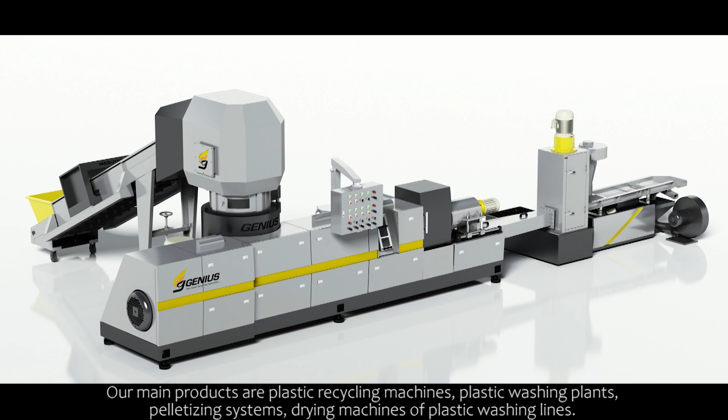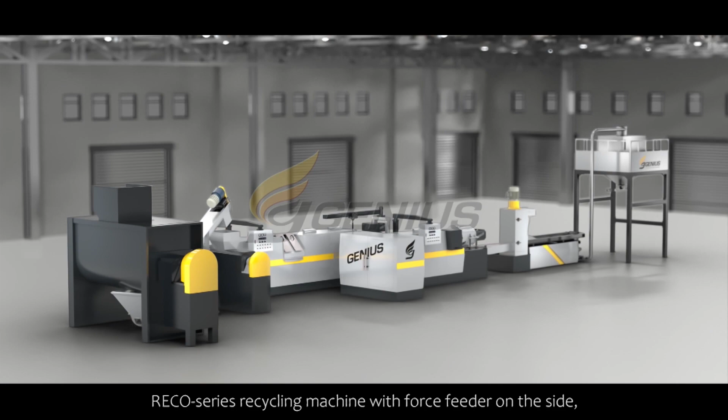Mr. Peter, what are the main products that Genius Machinery manufactures? Our main products are plastic recycling machines, plastic washing plant, pelletizing system, drying machine of plastic washing line. Additionally, we also produce shredders and crushers. Oh, very interesting, Mr. Peter. Talking about that, what are your most popular machines? Our popular machines are KRIEGER Series cutter compactor recycling machine, RECO Series recycling machine with force feeder on the side, and DW Series squeeze dryer.

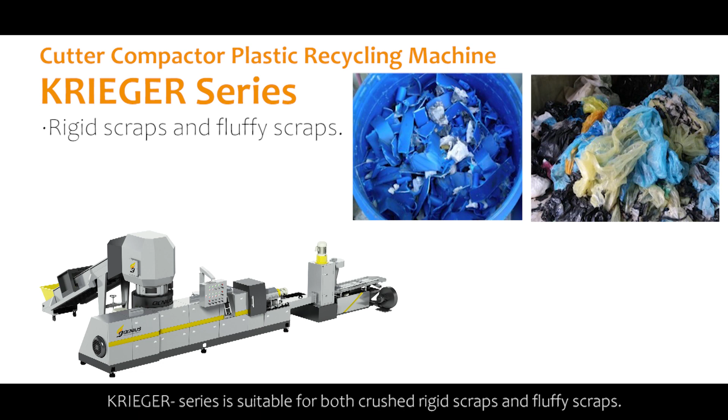Mr. Peter, you mentioned your KRIEGER series. Can you explain more about those machines? KRIEGER series is suitable for both crushed rigid scraps and fluffy scraps. The capacity of this series is from 80 to 1,500 kg per hour, depending on the model. The feeding device sends the material to the cutter compactor, which has different functions such as crushing, drying, and compacting the materials. It steadily sends material into the extruder.

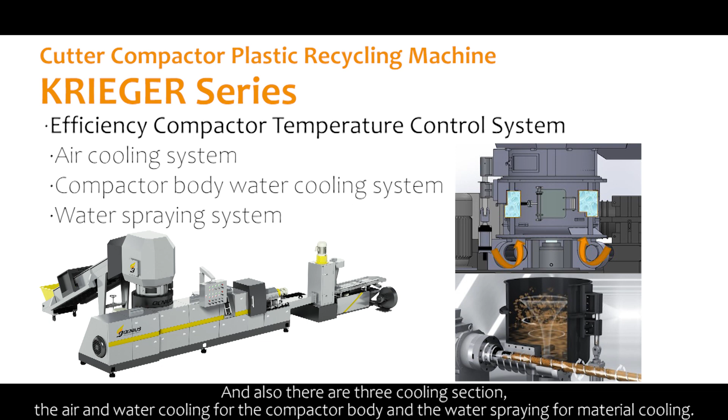And also there are 3 cooling sections, the air and water cooling for the compactor body, and the water spraying for material cooling. The operator can set the temperature of each to stably control the compactor's temperature.

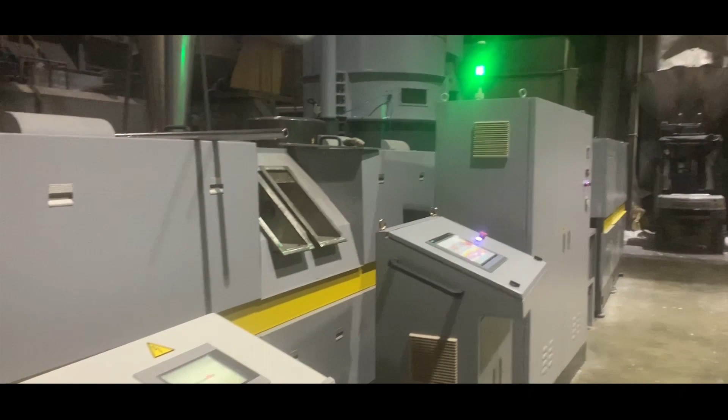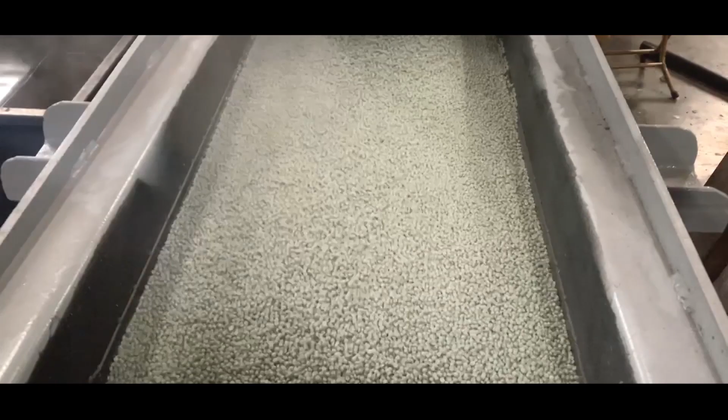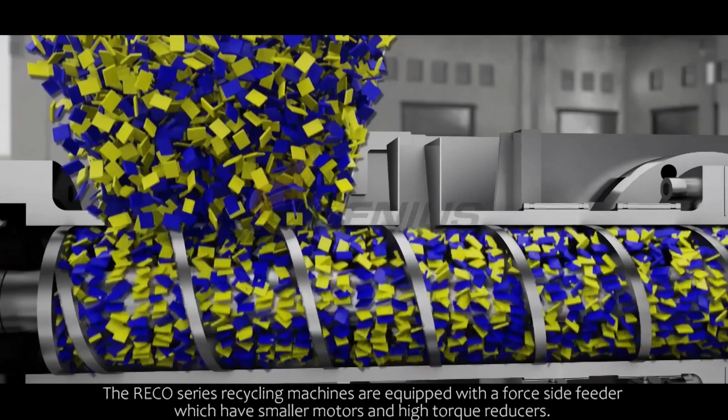Mr. Peter, your RECO Series are recycling machines with force feeder. Can you explain the features of these machines? RECO Series recycling machines are equipped with the force side feeder, which have smaller motors and high torque reducer. The crushed rigid scraps are sent into the extruder steadily. If you recycle the rigid and the crushed scraps only, this model will be the best. It can save much energy in processing.

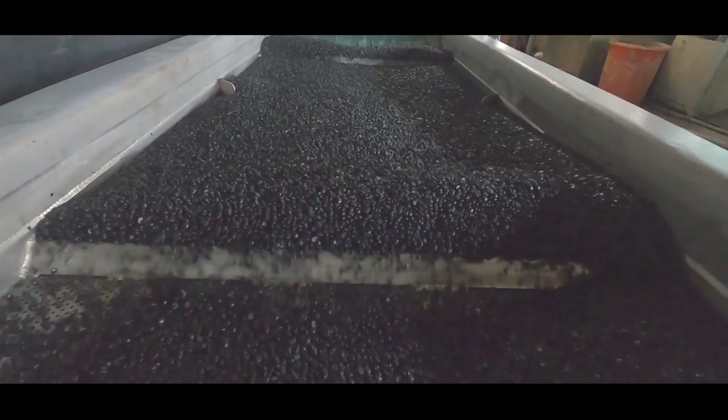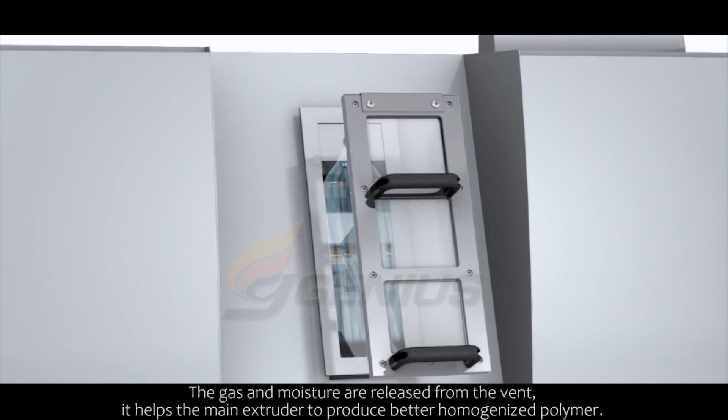Mr. Peter, your KRIEGER and RECO Series are well recognized in the industry. Is there any specialty on them? For both KRIEGER and RECO Series, we install a degassing system. The gas and moisture are released from the vents. It helps the main extruder to produce better homogenized polymer. An optional vacuum system is available to increase the degassing effect.

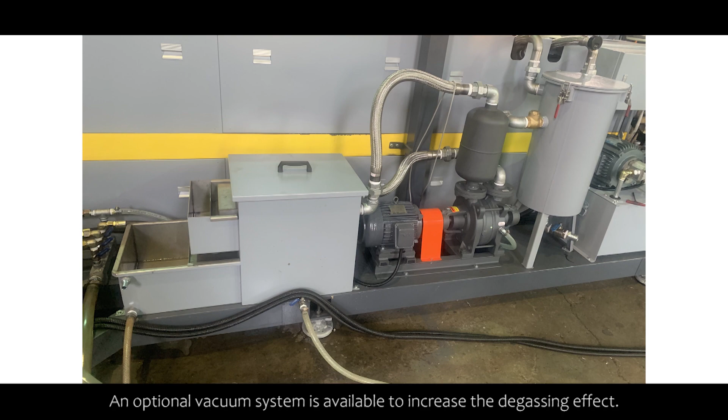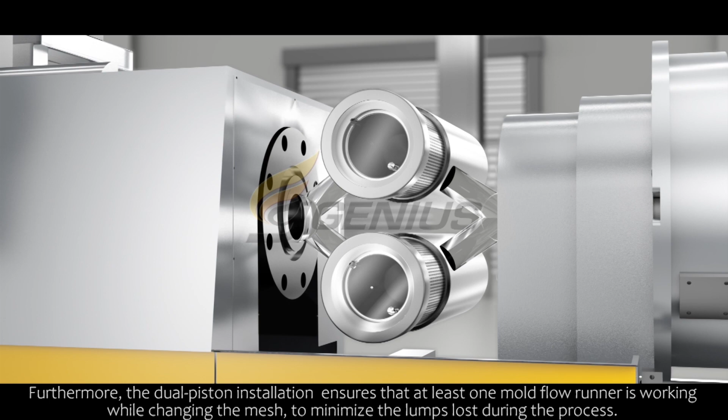And we have different kinds of filters. One is the dual piston filters, which have larger filtration areas. From our experience, it could provide up to 3 times the filtration capacity than the pure plate filter. Furthermore, the dual piston installation ensures that at least one mold flow runner is working while changing the mesh, to minimize the lumps lost during the process. We also cooperated with European companies who manufacture self-cleaning filtration systems like Fimic or Ettlinger.

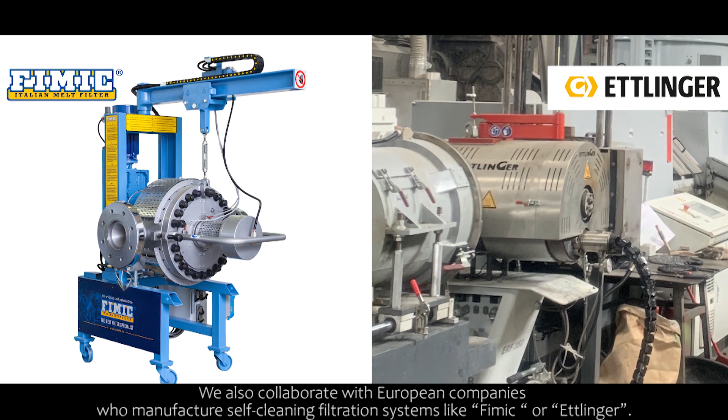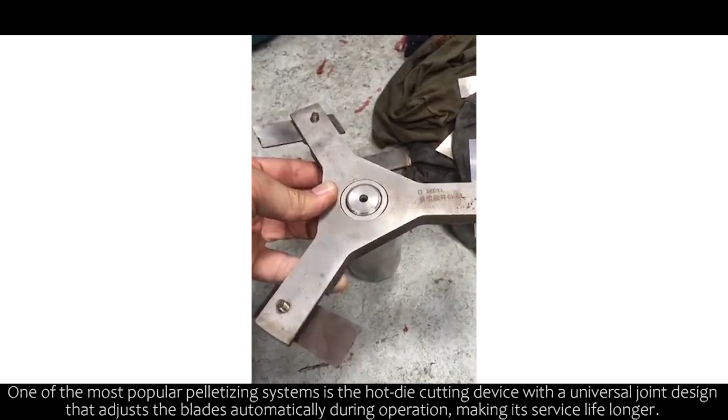And regarding the pelletizing system, we provide different solutions for different materials. One of the most popular pelletizing systems is the hot die cutting device with a universal joint design that adjusts the blades automatically during operation, making its service life longer. The final plastic pellets are also in uniform size, making their value higher, therefore generating more profit.

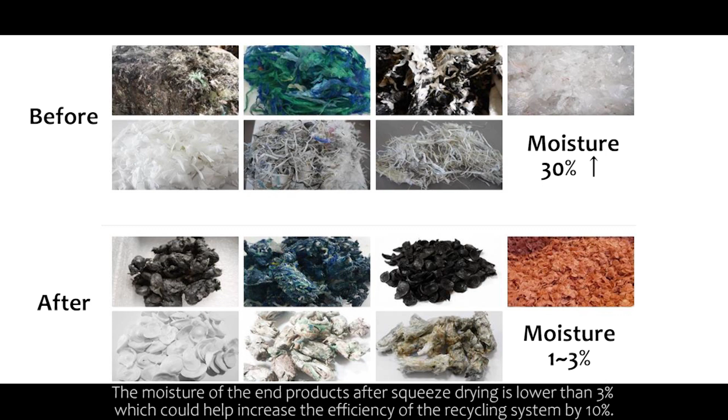You also mentioned your DW series squeeze dryers. These are very popular in different sectors of the industry. Can you give us a little bit more insight about this? Yes, our DW series squeeze dryer has a specially designed screw that removes water from the washed fluffy scraps. The moisture of the end product after squeeze drying is lower than 3%, which could help increase the efficiency of the recycling system by 10%.

Some of our customers recycle dirty plastic films. They normally buy squeezers to reduce moisture of the washed plastic films. After the moisture has been removed, the products are better compacted and more solid. The customer can then recycle this squeezed material by just using our RECO series. They don't need to use the cutter compactor recycling machine, therefore saving energy.

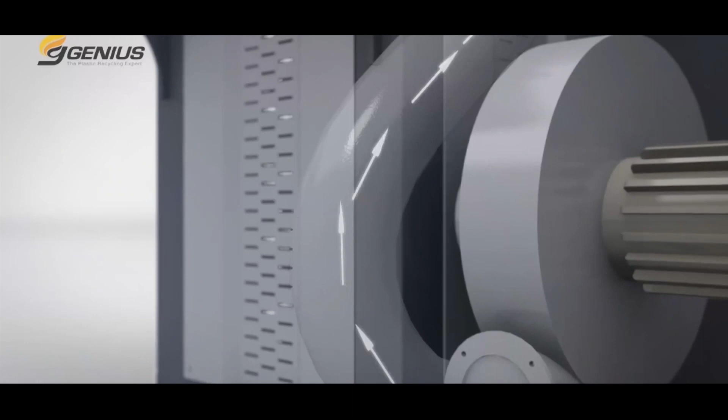Mr. Peter, usually one of the main questions of customers is what materials can be processed in different machines. How about your machines?

General plastic. Most of our customers recycle PE, PP, PS, PC, PET, ABS materials and so on. It may be clean or dirty. It may be fluffy or rigid. If the material is still dirty after washing, or contains labels or other unnecessary stuff, you can do a two-stage recycling process to filter them twice to ensure nothing is left anymore.

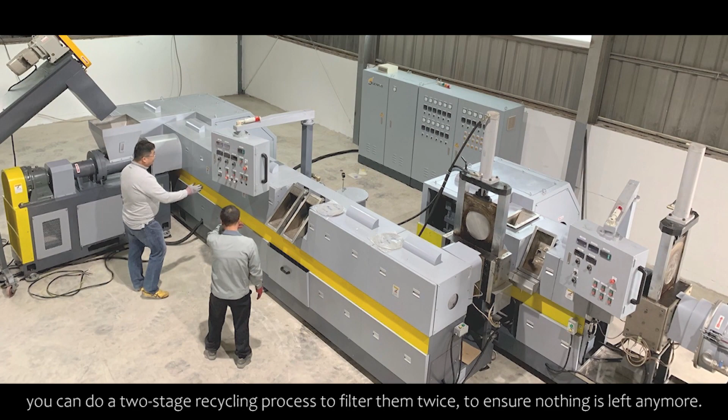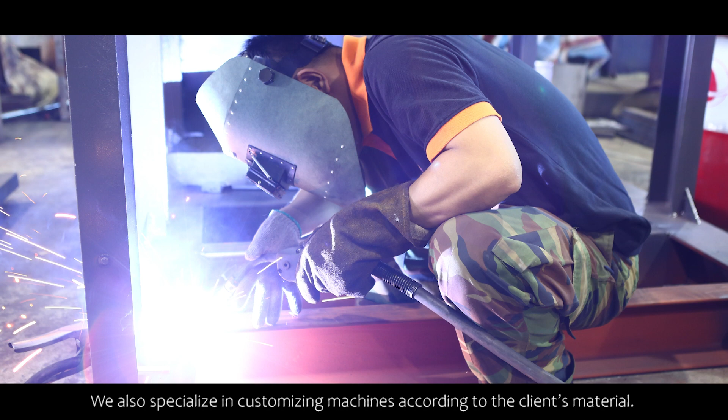Mr. Peter, what makes Genius machines different from other competitors? We make sure that we meet the customer's spec and needs. We continue innovating our machines. We make changes constantly. We add new features and functionalities. The old client can see the difference between our older and new models. We also specialize in customizing machines according to the customer's material. The most important value is we take pride in our unparalleled after-sales service.

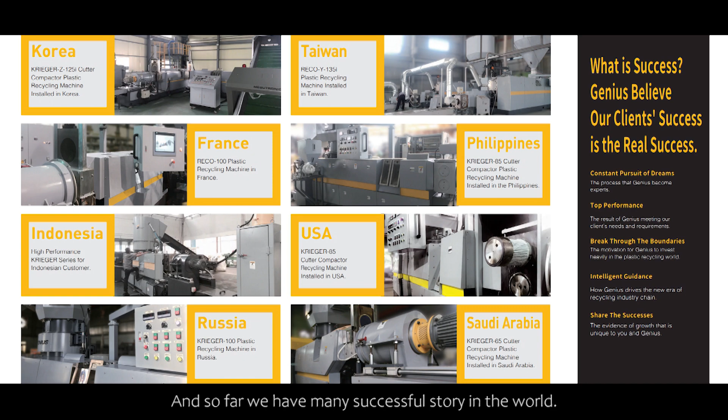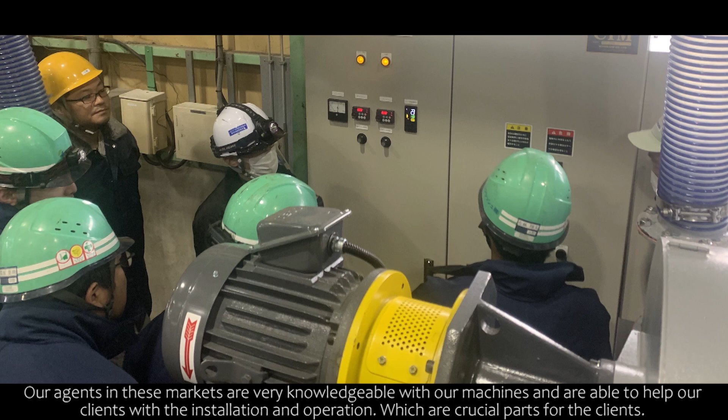Is there any specific market you are trying to develop business in? We are currently eyeing strengthening our business in Latin America, as it's a big market and we have actually already made sales in countries like Brazil, Ecuador, Peru, and so on.

Mr. Peter, nowadays, what are the main challenges in the industry? Yes, a lot of industries have been struck by this current pandemic, and unfortunately, ours is one. This year, our team cannot visit customers abroad, and we cannot display our machine in the exhibition. It's not easy to present our machine without participating in them. All similar events were cancelled this year.

Mr. Peter, how are you coping with these challenges? Yes, we have been trying different methods to reach out to the customers and provide support, like online conferencing. Fortunately, we still have some sales this year, particularly from the existing customers and those who already discussed with us prior to the pandemic. I'm glad to hear that you still get some orders from previous customers, but how about new customers? We didn't get to visit new customers this year. At the moment, it's not as busy as it used to be. And we have more time. We have been focusing on the innovation of our machines. We are using this time to develop new machines with higher capacity and better quality.

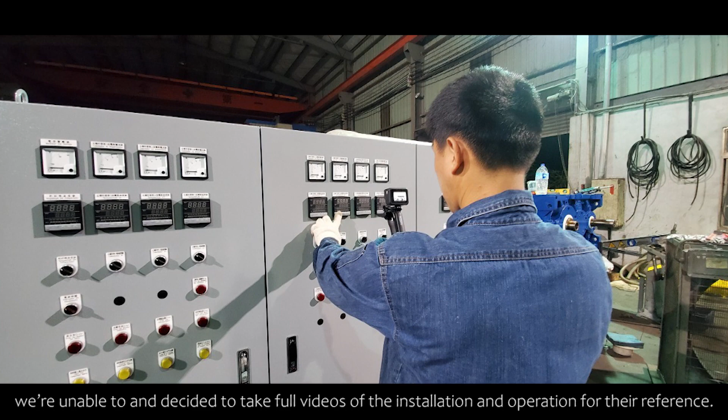Mr. Peter, one of the main concerns of international customers is how they are going to install their machines, since there are many countries where foreign visitors are not allowed. What is your solution to this problem? Yes, we figured out a way to solve this problem. We used to go to the customer site to install the machines, but due to the current global travel restrictions, we are unable to, and decided to take a full video of installation and operation for their reference. We also send them the user's manual. Additionally, they can reach us anytime if they have further questions.

Mr. Peter, what are the trends in the industry right now? The current European strategy for plastic is beneficial to our business and industry, as people are focusing more on plastic recycling. The circular economy action plan is a very important matter to the environment, government, households, and of course our industry. In the future, all plastic products must mix with a certain amount of recycled material. Therefore, the recycling industry is very promising and growing daily.